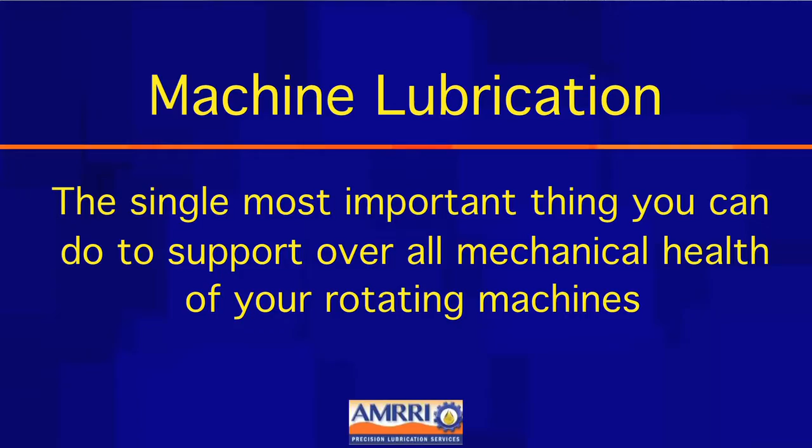This is a device we created to help our customers build precision lubrication work practices, particularly focusing on grease replenishment and critical element bearings in electric motors and other mechanical machines. Given that machine lubrication is the single most important thing you can do to support overall mechanical health of your rotating machines, I hope you find value in this. I encourage you to take a good hard look, see if it might apply to your own efforts as you build precision lubrication plans, and I look forward to receiving your comments either by email or phone call. Thank you for your time.

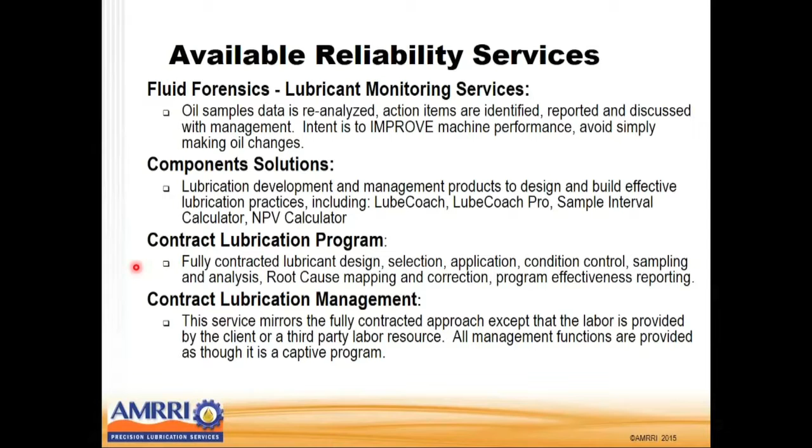First, a little bit about the company. AMRRI stands for Advanced Machine Reliability Resources Incorporated. AMRRI focuses on helping our customers improve machine reliability, typically Fortune 1000 sized manufacturers in process industries. There are 4 broad component types we bring to the table: fluid forensics, lubricant condition monitoring services, component solutions - which includes development of technologies like I'm about to show you - provision of training material for certification and qualification for lubrication technicians, development of work practices, and problem solving of particularly challenging issues. We also have the means to provide labor and management for the work of machine lubrication when called upon to do so.

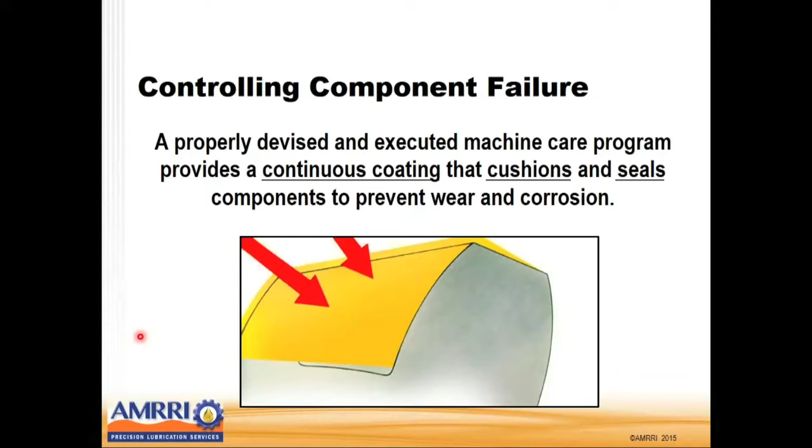Let's talk about the really big picture. In order for our lubricated parts, and all our rotating machines, to enjoy maximum productivity and life cycle potential, we need to assure a continuous coating of lubricant that cushions and seals components to prevent wear and corrosion. In short, we need a clean, dry, continuously supplied, perpetually healthy machine lubricating film, whether we're supplying oil or grease, in order to avoid loss of component life cycle, such as we see in this example.

If we aren't able to provide that clean, dry, productive film, then we suffer scheduled and unscheduled repairs, which produce loss of productive time. It doesn't matter whether the repair is scheduled or not - if we're replacing lubricated parts, we need more from our machine lubrication program.

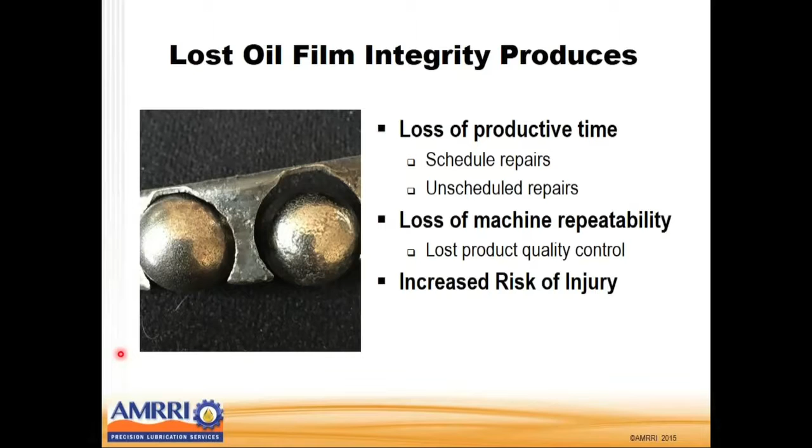Loss of lubricated parts produces problems with quality control through lost machine repeatability. If we are doing unscheduled repairs, statistics tell us we have an increased risk of injury, particularly when the unscheduled repairs are urgent or emergency repairs. It produces a higher cost of production per ton. Ultimately, all of these things lead to lost competitive position for our company. And as tough as life is today in manufacturing and maintenance, it's not going to get easier.

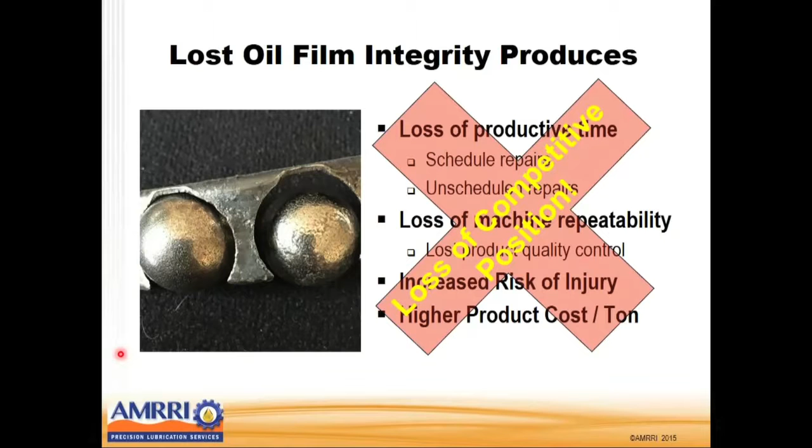The machine lubrication work process and work practice is often a source of undiscovered benefit for the whole machine reliability effort that we have. The folks that make our components tell us straight up that there's a substantial connection between the effectiveness of our lubrication program and the life cycle of our parts.

Here's an SKF representation where in their chart, one of their bearing lubrication manuals suggests that 57% of the time when bearings fail prematurely, lubrication issues are involved through inadequate lubrication, contamination, and surface degradation or surface wear. The surface wear corresponds to the lubricant's inherent capacity to protect machine surfaces. Now, this slice of the pie suggests to us that we don't really have a substantial problem with lubricant capability.

We do have a problem with how we go about managing, applying, and reapplying the lubricant. In fact, inducing contamination and just presenting overall inadequate conditions. So we don't really have a lubricant problem per se - we have a lubrication practice challenge.

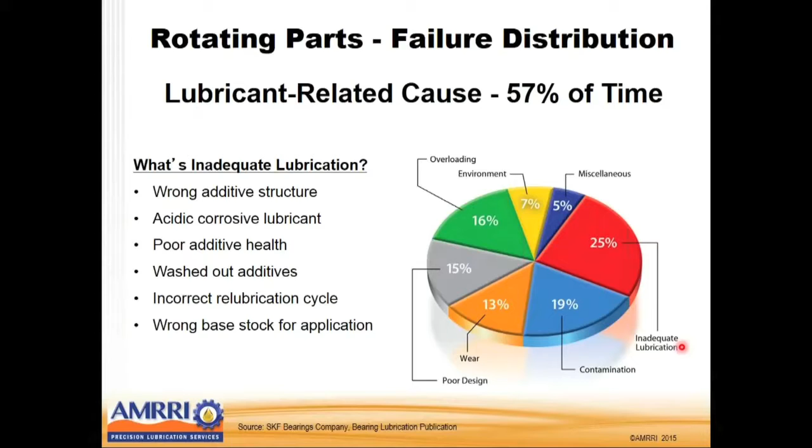So let's go through the process one might follow to come up with what represents a very high quality lubrication plan for element bearings. We're going to pick on electric motor bearings here because they are particularly challenging to us, and people are prone to look for any kind of improvement. Since they're element bearings most of the time, this will correspond pretty well. So let's talk about electric motors for just a moment.

If we approach the motor and look at the nameplate, we will often see the details we need to identify the bearing type and size, and certainly we also need the bearing's operating speed, or rotating shaft speed. This number we see here, the 6308 UU, represents an ISO or DIN designation for the LS, or load side, bearing.

6208 represents the designation for the other side or opposite side bearing. The 63 designation tells us it's a beefier bearing close to the coupling. The 62 designation tells us it's a smaller or less beefy bearing, same shaft size, same ID, but not as much metal, located on the shaft further away from the coupling.

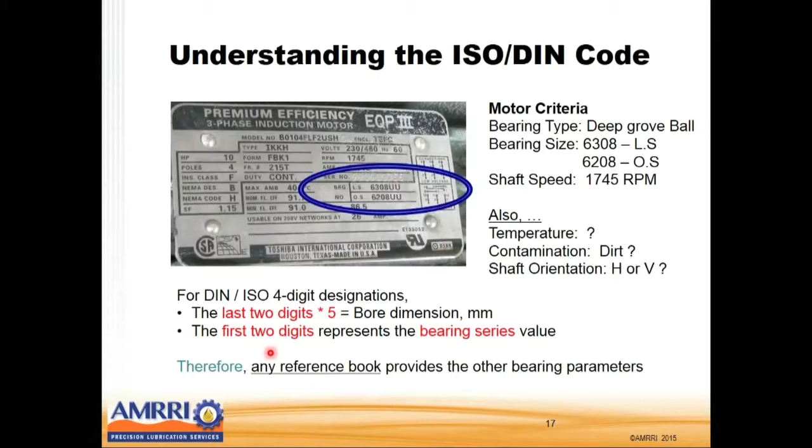So with that as a starting point, we have a lot of information already we need in order to be able to come up with a very high quality lubrication plan for this particular motor. Some of the older motors that we work with have a different style bearing designation, super secret Dick Tracy code.

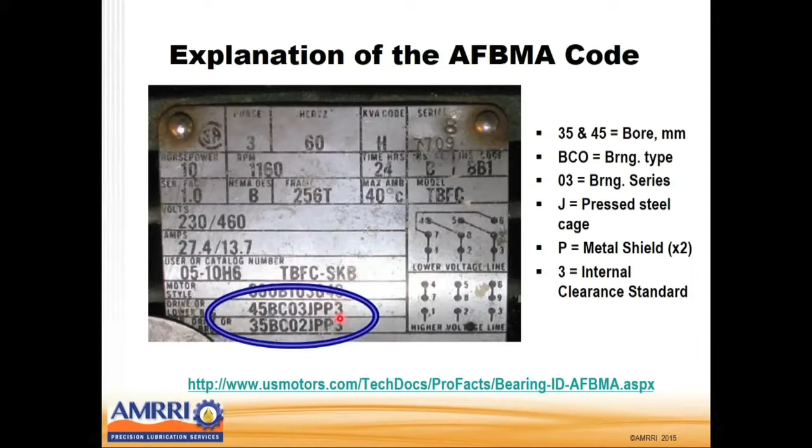The other information we see here, 03 and 02, represent the size or the design of the bearing. 03 is a more robust bearing, once again, and JPP3 represents the cage and/or shielding design. So lots of information buried in that number there.

So the first question we have to ask ourselves when we're looking at an element bearing and we're holding a grease gun is, should we be lubricating this bearing with grease? Clearly, there is a speed parameter which tells us it's okay for lubricating with oil, and a much lower speed where it's okay for lubricating with grease.

The speed parameter bearing manufacturers refer to as the NDM value. The NDM value speed limit, if you will, differs for bearing designs. Ball bearings have higher speed limits than thrust, ball, and roller bearings. Spherical roller bearings have higher speed limits by just a slight degree than thrust, ball, and roller bearings.

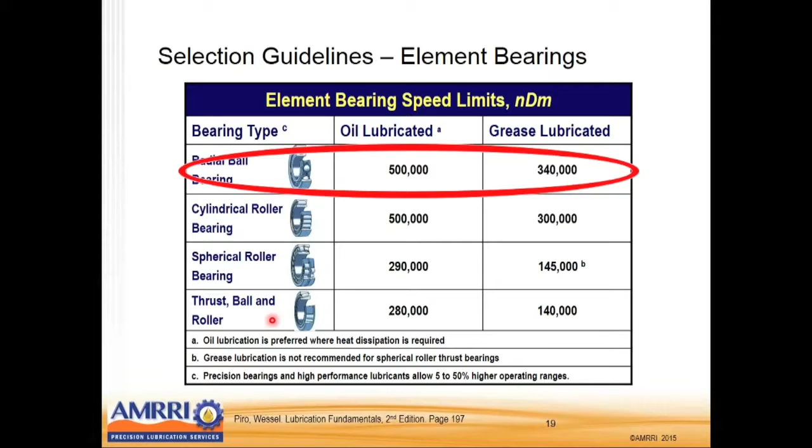So we've got to ask the question, is it okay to lubricate this bearing with grease? And if not, we need to lubricate with oil. We needed to make a determination what our speed is, and that is a function of the bearing type, size, and rotating speed. So step one is to calculate the speed limit to find out if it's okay to lubricate the bearing with grease.

And you would think intuitively that a machine designer would not send us a grease bearing with instruction to replace grease if in fact it's not okay. Regrettably, that's just not the case.

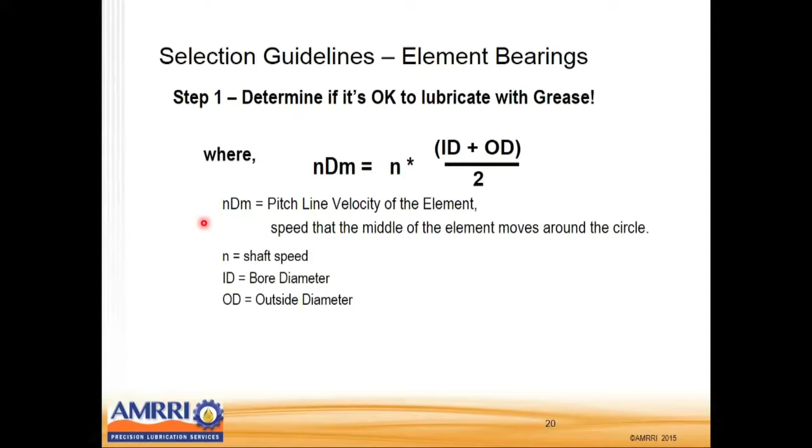So it's pretty simple to figure this out. The NDM value is that bearing's shaft speed times the sum of the bearing ID plus the OD, divided by 2. Now you could say this NDM value is the same thing as the pitch line velocity. That's a fair representation. We need to plug in the numbers and come up with the details.

So back to the bearings that we first looked at, the 62 series bearings. It was 6208 if you recall. Looking up the bore and the OD dimensions for that bearing, and looking at the nameplate information to see the shaft speed, we have 1745 times the bore, the ID, plus the OD, divided by 2, or 120 divided by 2, or 1745 times 60, and our NDM value, speed limit value for the smaller bearing, is 104,700.

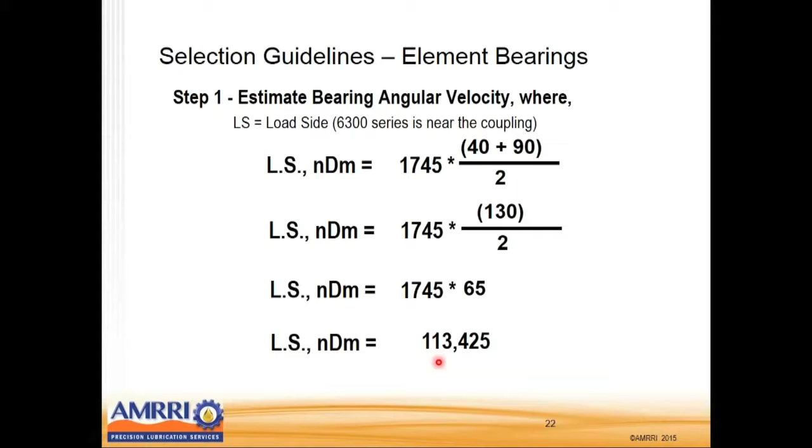The larger bearing on that first motor we looked at has slightly different parameters. Again, the bore is the same, the OD is slightly bigger because it's a larger, beefier bearing. Follow the logic: 130 divided by 2, so we have 1745 times 65, giving us 113,425. So we have just determined the NDM value for these bearings.

We compare these bearings, which are ball bearings, to the chart. Any number less than 340,000 is okay for grease lubrication.

And I'm going to deviate from the normally scheduled program here for just a moment. It is fair to say that there are specialty grease manufacturers that do produce greases capable of NDM values, or speed limit values, approaching 1 million. But our rank and file products don't give us that luxury.

So, step 1, calculate your NDM value. Step 2, compare to the general parameter, the speed limit parameters we see.

Here's a chart that's useful for that. Determine, is it okay to lubricate with grease? And if not, is it okay to lubricate with oil? And if not, we're really talking about mist, then that's a specialized application.

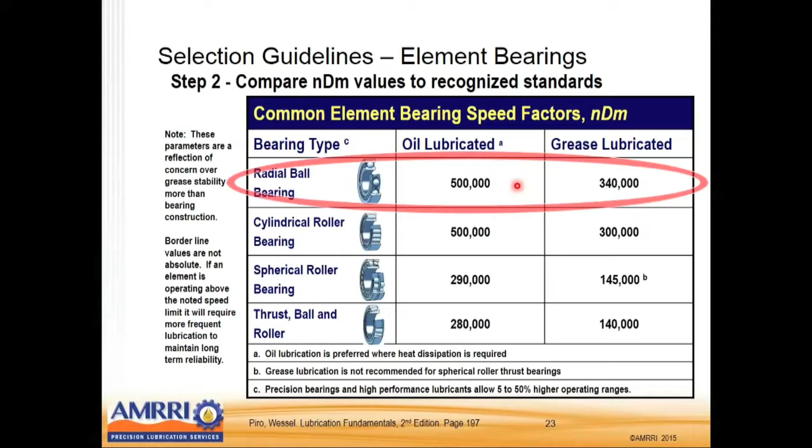Step 3, once we have decided it is okay to lubricate with grease or oil, it doesn't matter which, we now have to determine what oil thickness we need once the bearing is up to normal operating speed and normal operating temperature. So in order to do so, we can always go to the bearing manufacturer's lubrication book, pull out a chart that looks like this, where we find the bearing's mean diameter, DM, on the bottom axis, and the bearing's shaft speed, which is, in this instance, 1745, on the vertical axis. And where DM intersects with shaft speed, we have a drop-dead viscosity grade.

So that's one way to go about determining it, or we can be more specific and calculate the minimum viscosity. The formula, which is really pretty straightforward: 27,878 times shaft speed to the negative 0.7114 power, times the bearing's mean diameter to the negative 0.52 power. That works out to give us a bottom line viscosity, a minimum allowable viscosity.

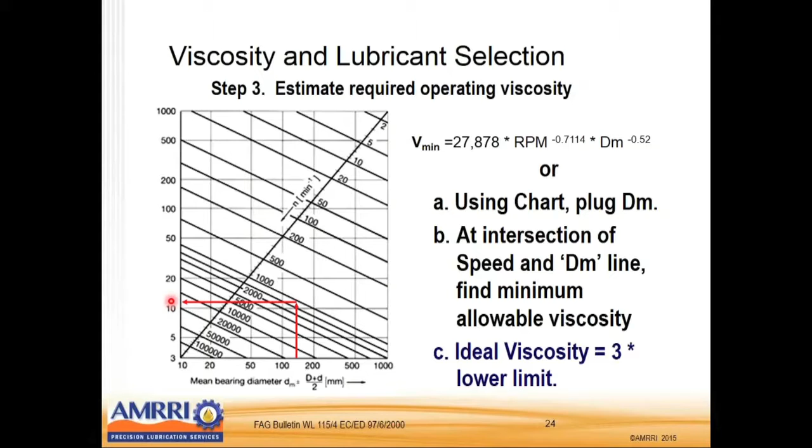Whatever number we calculate or estimate, we take that and multiply it by 3 in order to come up with the ideal viscosity. So if we happen to guess that it's 12, 12 times 3 is 36. So we want to pick a lubricant such that once the oil in the grease, or once the oil, gets to normal operating temperature, we still have at least 36 centistokes.

So once again, let's apply this logic to our first motor example. We're going to calculate the minimum viscosity. 1745 was the speed, and DM was 60. So we plug the numbers in, do the calculations, and we come up with the minimum allowable viscosity of 16.3836, or rounded to 16.4.

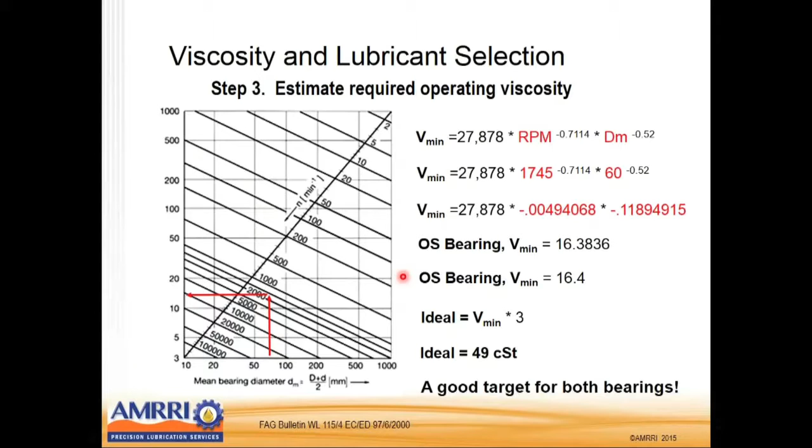Multiply this value times 3, and we have a target viscosity of 49 centistokes for the opposite side bearing. For the load side bearing, we're going to come up with a very similar number, and for the sake of abbreviating this presentation, we're going to say it's close enough. In both instances, we're looking for a grease that gives us at least 49 centistokes once we're at normal operating temperature.

Well, the next question is, for the product that we have in our grease gun, what is the actual viscosity at actual operating temperature? So let's say we're using a Chevron SRI electric motor grease, which happens to be a premium quality product, a very good quality product. If that element bearing, that motor, is operating at 50 degrees C, which is equivalent to 122 Fahrenheit, and we're looking at the oil viscosity in that SRI grease, which is 110, if I recall, so we call it an ISO viscosity grade of 100.

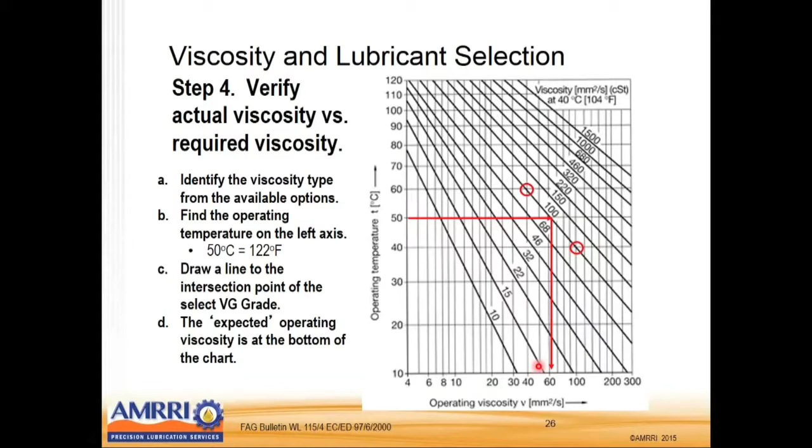At 50 degrees C, where that temperature line bumps into the viscosity line, we drop straight to the bottom, and we see that our equivalent viscosity at operating temperature is 60 centistokes. Back one page, we saw that we wanted 49, or at least 50. All right, so we determined that yes, indeed, not only are we above 49, we're really in a very, very good product selection for this particular electric motor.

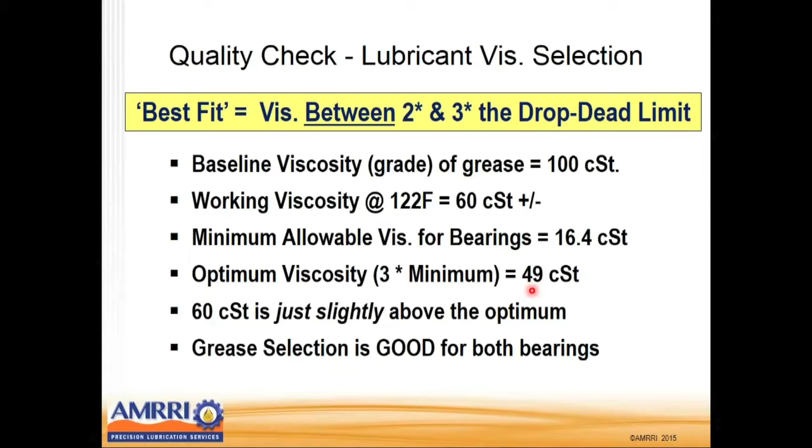The best fit that we could hope for would be a viscosity somewhere between 2 and 3 times the lowest allowable limit, or the drop dead limit. Most electric motor greases have a baseline viscosity grade of 100 centistokes. That's by design. The working viscosity at 122 degrees, 60 centistokes plus or minus, tells us where we are. 16.4 centistokes times 3 is 49. 60 centistokes is just slightly above 49, but we would say that's good enough.

Let's move forward. Next question is one of whether we wish to try to use an EP formulation. Well, this is a bit of a busy chart here, but the bottom line is anytime our actual viscosity is at least 1 times the drop dead limit or greater, then we don't really derive any value from the use of EP chemistries. This 1 times the required viscosity or greater is called the kappa value, and strictly speaking, it's the actual viscosity of the lubricant provided divided by the required viscosity grade. A score of 1 or better says don't use EP products. That is a good rule of thumb.

The chemistry within the EP products actually does have a mildly corrosive effect, and anything you can do to avoid inducing corrosion is good.

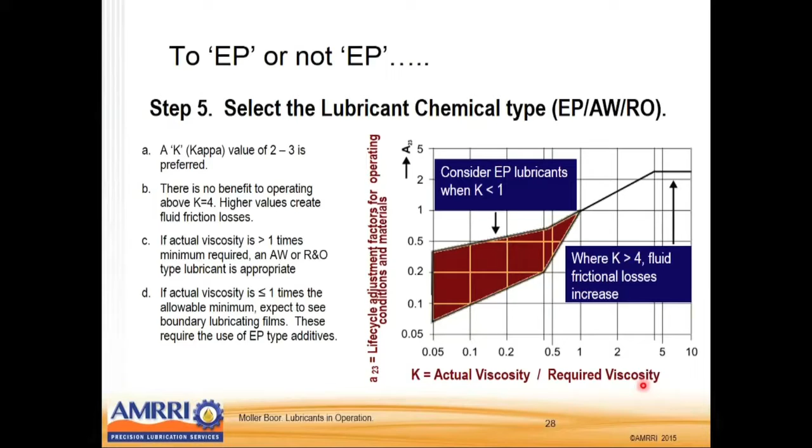So as it turns out, our electric motor greases do not typically include EP attributes because we have made a good enough viscosity base oil selection such that they're not required. Well, that was step 5, EP product or not.

Step 6, we need to determine what volume we need to apply to the bearing, and that is a function of the bearing size. The SKF formula is bearing width times the OD times the space factor, 0.005 if our dimensions are millimeters, or 0.114 if our dimensions are in inches.

So going back to that very first motor again, the OS, or opposite side bearing, dimensions were 80 and 18, so 0.005 times 80 millimeters times 18 millimeters gives us 7.2 grams. The loaded side bearing was slightly beefier, 0.005 times 90 millimeters times 23 millimeters, the width of the bearing, equals 10.2 grams.

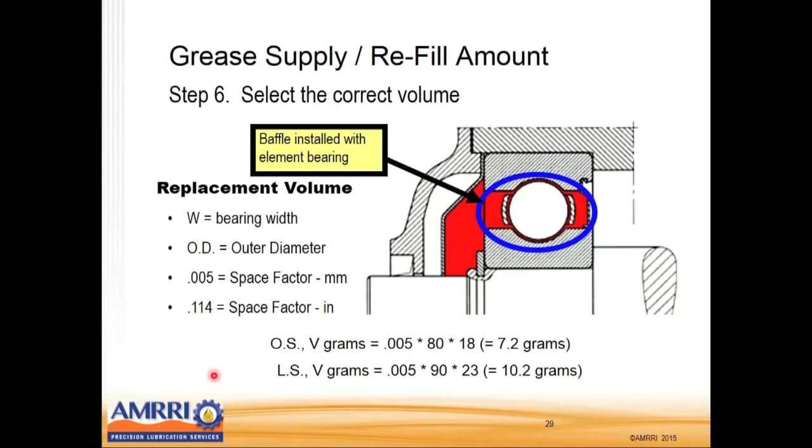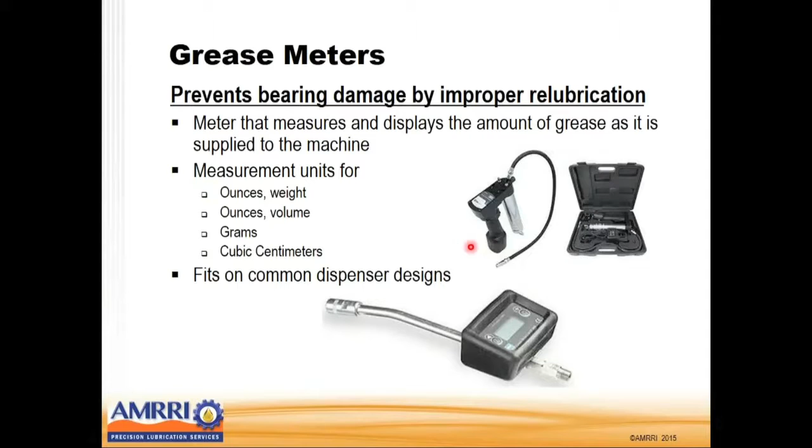Once again, we can be very specific about the quantity of grease that we ought to be considering for replenishment purposes. It is wise to use volume meters when lubricating high-speed and/or electric motor bearings. There's a few manufacturers of grease meters available in the market. It's wise to avoid the use of a grease gun that can produce a substantial amount of grease very quickly, particularly around electric motor lubrication.

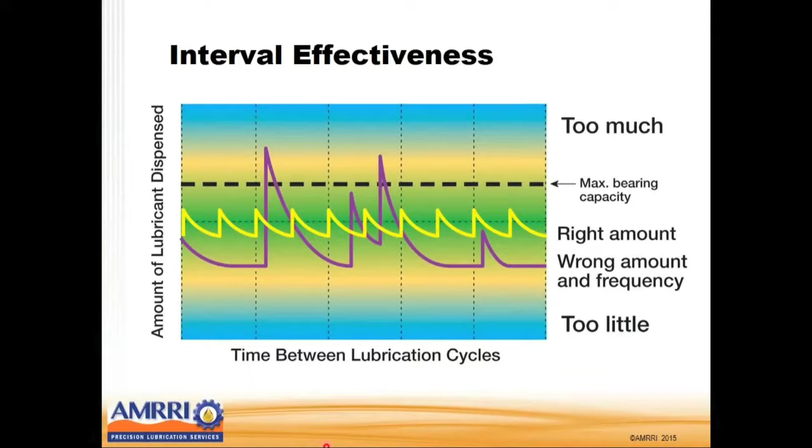So with that background, let's take a look at this application called the LubeCoach. Now the LubeCoach is a tool built for the purpose of being very specific about what we need to do with grease replenishment. We have the means to either key values into the LubeCoach here or use a lookup table.

Now if we have a user defined, then of course we've got to plug in the values, which means we have to get a measure out and go physically measure the bearing. But in this instance, since the bearing number is represented on the motor, we'll just pick that off of a pick list here. So the motor was

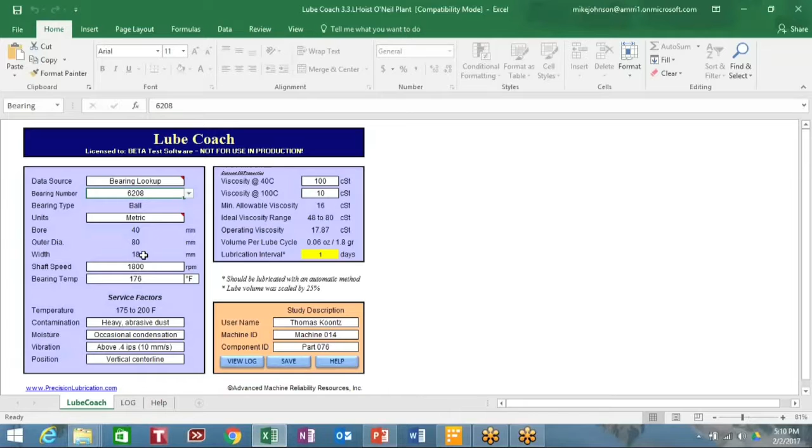6208. We're going to come right down the list here, and we're getting close. 6208. And success. So here are our dimensions. The bore was 40 millimeters, the OD was 80 millimeters, the width was 18 millimeters. We saw that previously. Here it is validated for us in our calculator.

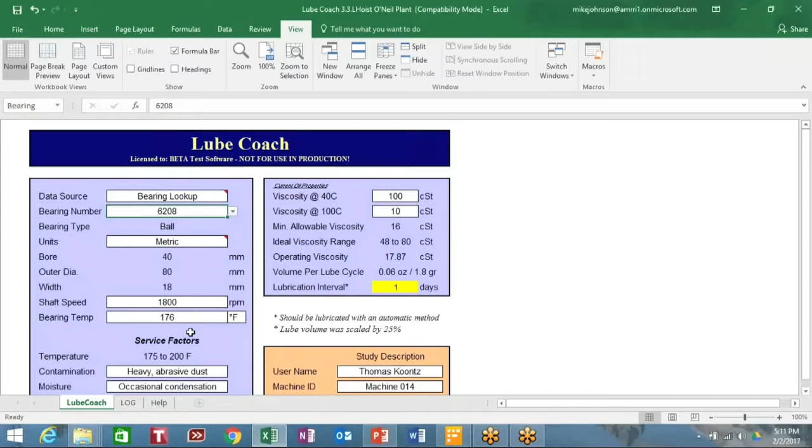Just scooch that up a bit so we can all see it a little bit better. We need to plug in the shaft speed, 1745, and we need to plug in the actual bearing temperature, and let's say it's 50 degrees C. So we have a few operating conditions that need to be considered

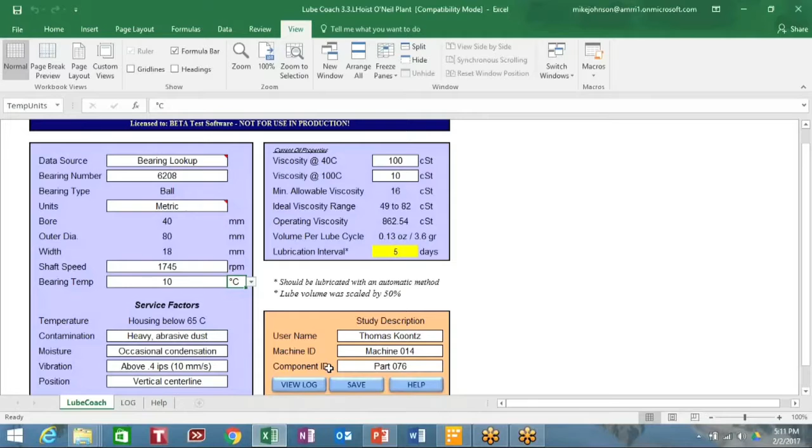when setting a frequency for replenishment. Let's take a look at those in our PowerPoint presentation here.

Now here's the formula used to determine the replacement interval. That formula has an operating environment parameter we'll refer to as K in this instance. K is the product of 6 factors multiplied together.

Bearing temperature, housing factor, temperature that is greater than 100 but less than 150 would be a 0.9. We see that number posted here in the box. The higher the temperature, the smaller the discount factor, meaning the higher the temperature, the shorter the replenishment interval.

Contamination factor, light non-abrasive dust, heavy non-abrasive dust, light abrasive or heavy abrasive dust, the more aggravating the atmospheric contaminant condition, the shorter the lubrication interval. Moisture factor, humidity below 80%, 80 to 90%, condensation on housing or water on the housing. The greater the water content, the smaller the factor, and again, the shorter the replenishment interval.

Vibration, and we're going to infer vibration means shock loading. Low shock loading, medium or high shock loading, the greater the shock loading, the shorter the replenishment interval. Shaft position, a horizontal position or horizontal axis is a factor of 1. Vertical axis is a factor of 0.5. Since we're fighting against gravity with the vertical axis, we should replenish more often.

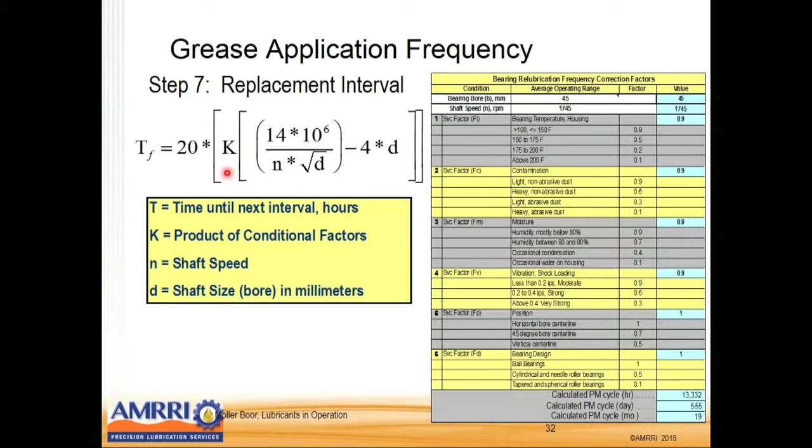The bearing design, ball bearings factor is 1, cylindrical needle roller bearings 0.5, tapered spherical roller bearings and thrust bearings 0.1. All of these factors in the green boxes are multiplied together to produce K. The rest of the parameters within the calculation relate to the bearing itself.

So with that in mind, let's come back over here to our LubeCoach and see how that is expressed. So we plugged in bearing temperature, 50 degrees C. Any temperature below 65 is given a default factor of 0.9.

The contaminant load, let's say it is an element bearing operating in an environment where there's light, non-abrasive dust. You could argue that the bearings are well shielded. We don't really have a lot of dust, abrasive or non-abrasive dust contact that's possible.

The same could be said for the moisture contact—occasional water, occasional condensation—and we've got a few extra factors here for really high-end water contamination. But let's say our humidity is between 80 and 90% instead of direct water contact on the motor bearing, the vibration load is relatively low, and we have a horizontal center line.

Once again, let's say we're using Chevron SRI polyurea grease, a very high quality electric motor bearing grease. Viscosity at 40 is about 110, and viscosity at 100 degrees C is about 12. That gives us information we need to know about the grease we picked, the interval, and the volume. Now we can go about determining when we need to go, what product we need to use, and how much we need to supply.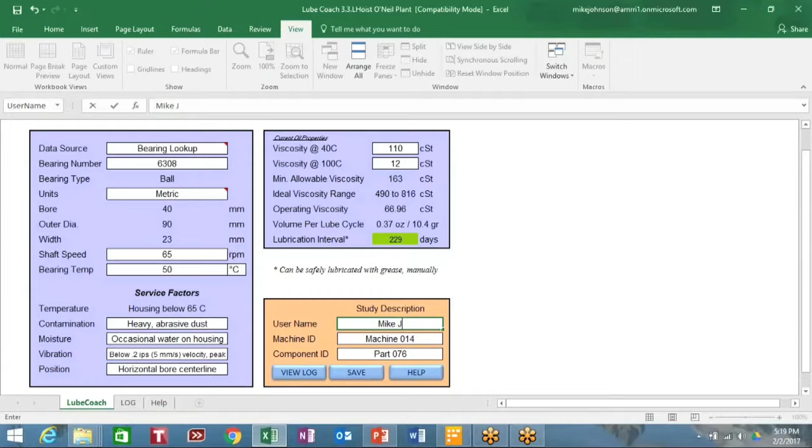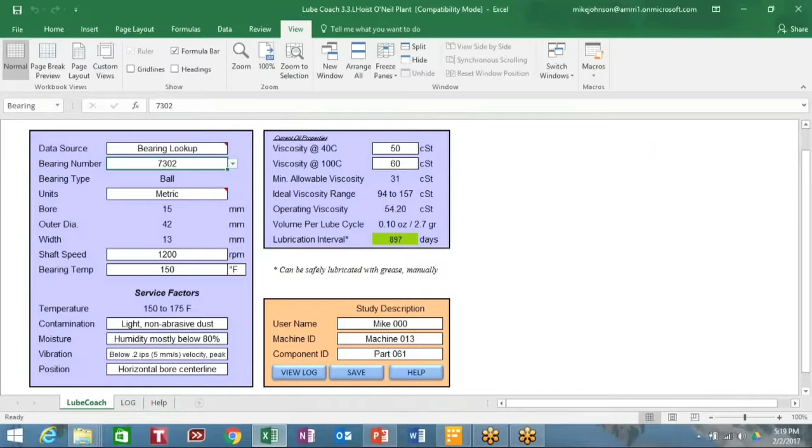So that's how LubeCoach works. Now, if we've keyed in this information and want to save it, we can do so very easily. You can type my name, machine number, and inboard bearing, and save this to a log where we now see Mike Johnson, the bearing, the machine, the bearings identified, the parts identified, the date, bearing parameters, operating conditions or influences, the calculations, and details about machine lubrication. We can store as many of these calculations as we like as time passes. If something changes around the machine's operation, we can come back to any of these parameters, double click on it, restore the study, and we're back to looking at the details we plugged in at some previous point in time. So this is how LubeCoach works.

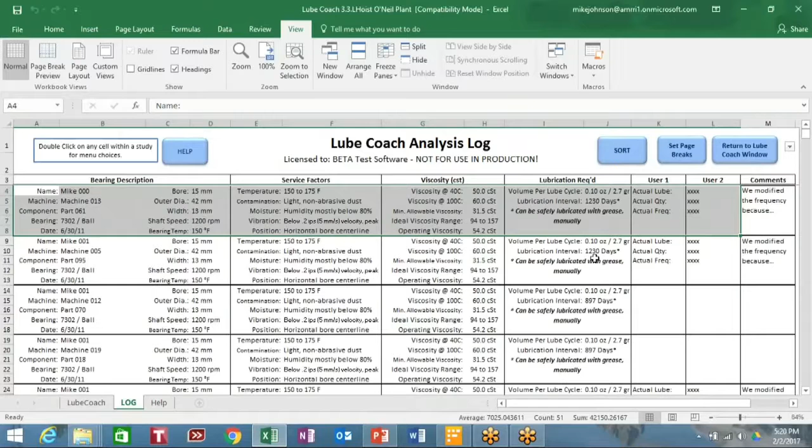With this information at hand, any reliability engineer would be able to provide very precise tasking for the volume and the frequency. This new work practice should be supported with the use of ultrasonic energy measurement. And while running these calculations, we can determine whether the lubricant we've selected is in fact a good fit.